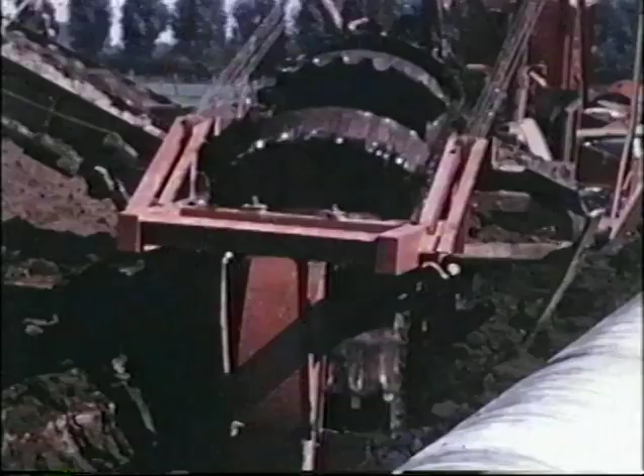In Central Europe, too, the growth of towns and nations was traditionally built on the yield of the soil. Broad fields of flax provided the basis of North Europe's flourishing textile industry. Today, oil and natural gas have wrought changes, laying the basis for a new and higher standard of living throughout Europe.

And far to the west, off the coast of the Americas, in the azure blue waters of the Caribbean Sea, the people of Venezuela have for centuries found food and natural wealth. The oyster beds of the Margarita fisheries were rich with pearl oysters. Centered around these precious gems was the economic life of hundreds of villages, thousands of people.

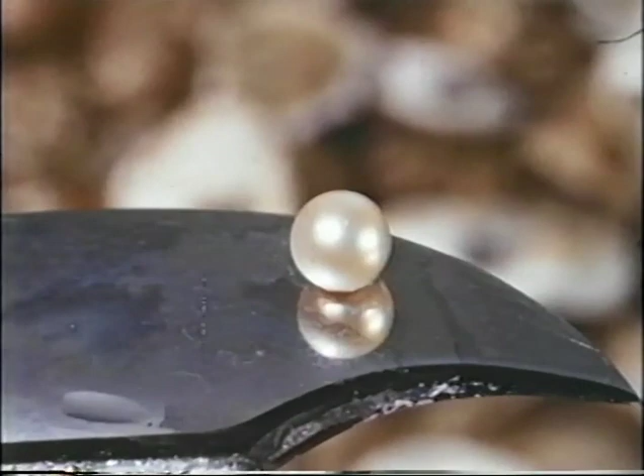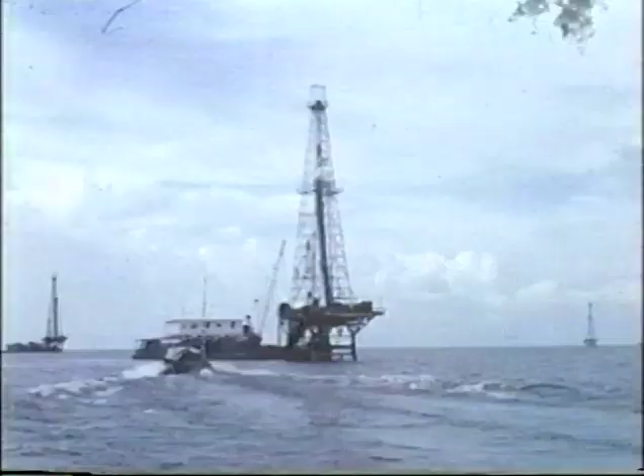Then, less than half a century ago, oil joined the Venezuelan economy. One well became 10, 100, then thousands. In Latin America, in Europe, and the Middle East, anywhere in the field of construction, engineering, and contracting for the oil industry, one name came to the fore.

Few cities in the world have played a larger part in the development of the petroleum industry than New Orleans, Louisiana. Both the city and the state have contributed much. While preserving its past in the old French Quarter, New Orleans is nevertheless a modern and enterprising community.

One of the city's largest and most dynamic business firms is the McDermott Company. With headquarters for field operations here in the Crescent City, it is a globe-spanning organization with oil engineering and construction interests in many parts of the world.

Typical of its work is the Superior Oil Company of Venezuela's Flow Station Number 1 in Lake Maracaibo, which processes 55,000 barrels of oil a day.

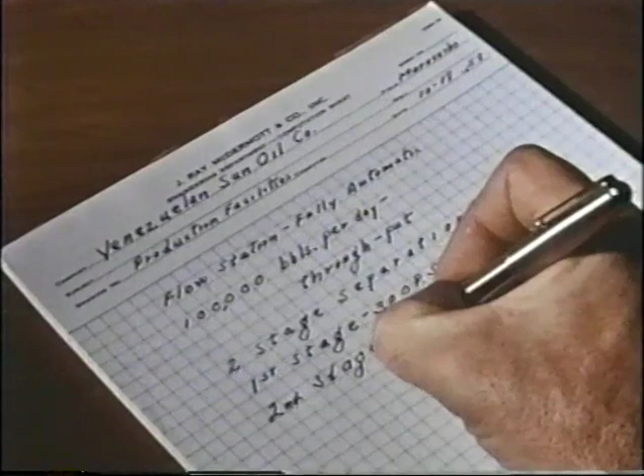Moreover, as envisioned by Sun's management, the flow station would be electronically automated and self-controlled. If the answers to these complex problems could be found, the installation would be a landmark in the history of oil industry progress.

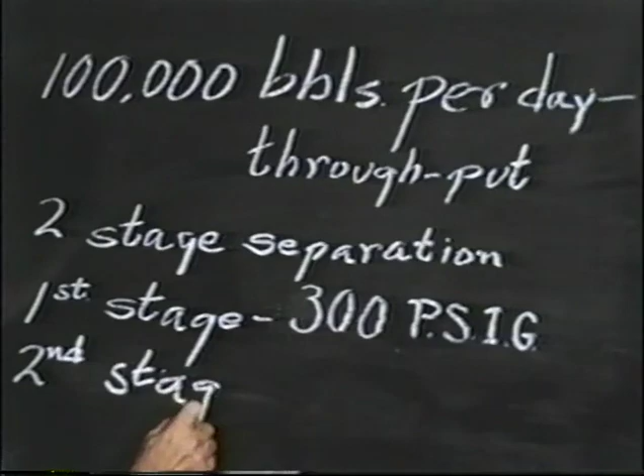All the information gathered at the initial meeting with the Sun management in Venezuela is promptly relayed to McDermott's headquarters in New Orleans. Here, various engineering specialists gather to be briefed on the general characteristics of the flow station desired by the oil company.

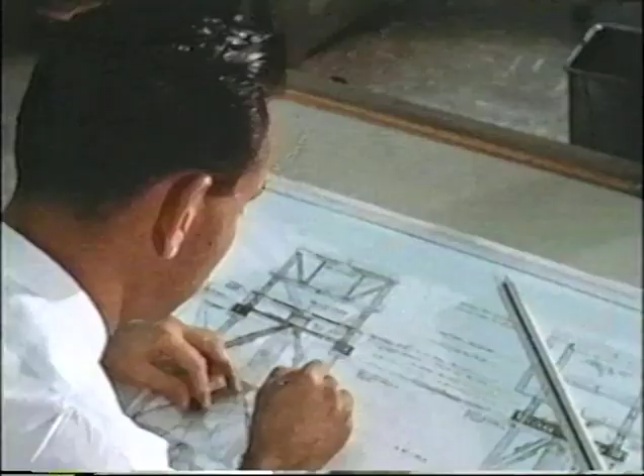Because of the intricacy of design, careful pre-planning will be a vital element in the success of the project. 4 weeks after the meeting in Venezuela, detailed engineering plans are well underway. The specifications being prepared will not only spell out the design of the revolutionary new flow station itself, but also for the procurement, fabrication, and installation of the entire complex of machinery.

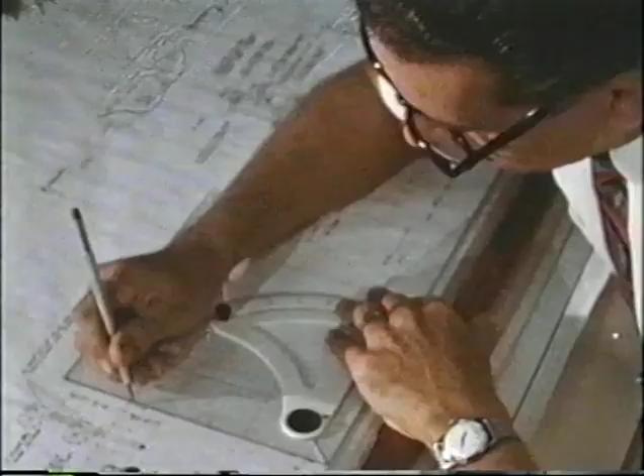Scores of draftsmen devote full time to this single project, and often far into the night. All are well aware that this is one of the most significant projects ever tackled by the company, that they are working on a precedent-setting installation.

All in all, there are some 600 drawings involved. After 6 weeks of intense work, 3 fat volumes of specifications are the end result. At the same time that the specifications are submitted to Sun's management, simplified drawings are presented to show as graphically as possible how the entire installation will be integrated with already existing facilities, how the plans allow for additional flow stations to be added to the field in the future.

Erected on an aluminum structure, the electronically automated production flow station will be capable of handling 100,000 barrels of oil per day with only mechanical supervision.

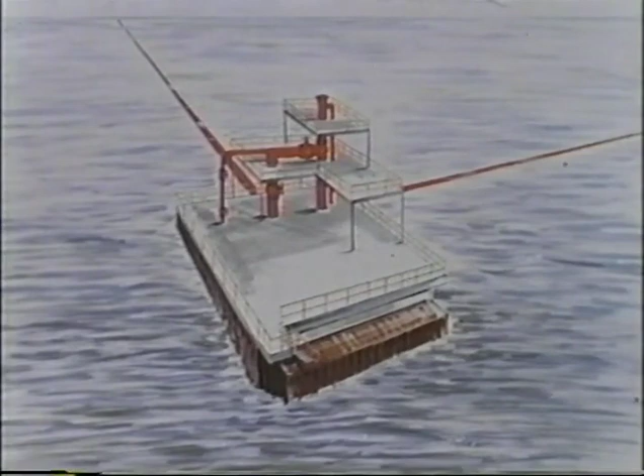Simultaneously, a junction platform will be erected a mile away. This junction of the lines from the flow station is the takeoff point for the 35-mile pipeline to shore.

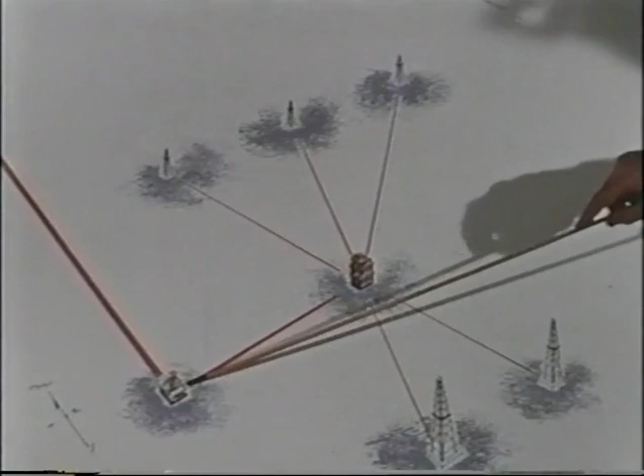Further, it was proposed to construct and install wellhead facilities on each well platform, to lay the flow lines from the wells to the station, to construct and lay the 14-inch gathering lines from the flow station to the junction platform, and to construct and lay the 35 miles of main 18-inch pipeline in 90 feet of water to the tank farm ashore.

All in all, a monumental undertaking.

After several additional meetings, when new refinements are discussed in the list of specifications, Sun gives McDermott the order to go ahead to handle the entire project from the design and fabrication in the United States to installation at the work site in Lake Maracaibo.

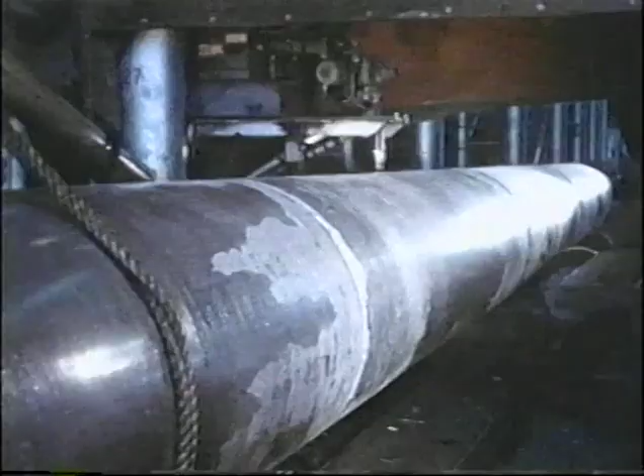7 days later, at the company's Bayou Boeuf plant near Morgan City, Louisiana, the fabrication of the aluminum structure is started. This large diameter aluminum pipe has been formed on the rolling mill from 3/8-inch flat plate here in the plant. The caisson, an integral part of the structure, will be built in similar fashion.

At the same time, in another part of the yard, work on the flow station itself begins.

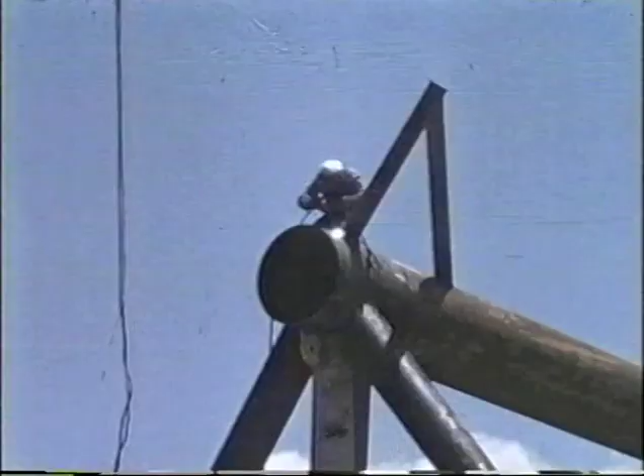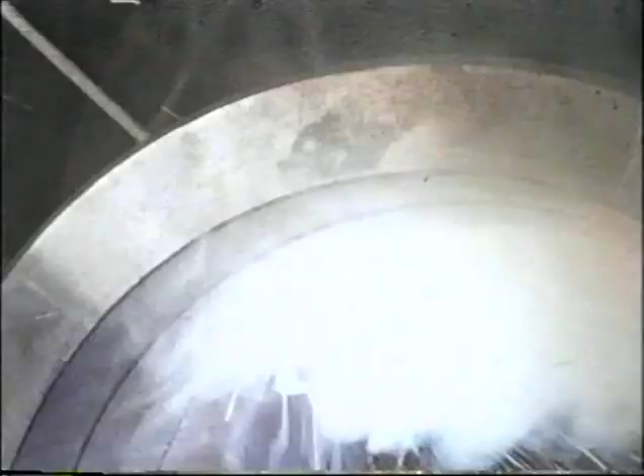Among the first pieces fabricated are the flanges for the risers, which will hook up with the flow lines of each well. Because of the thousands of parts and miles of wire to be incorporated in the giant piece of machinery, a finely drawn timetable is established to coordinate the installation of the various elements at the work site in Lake Maracaibo.

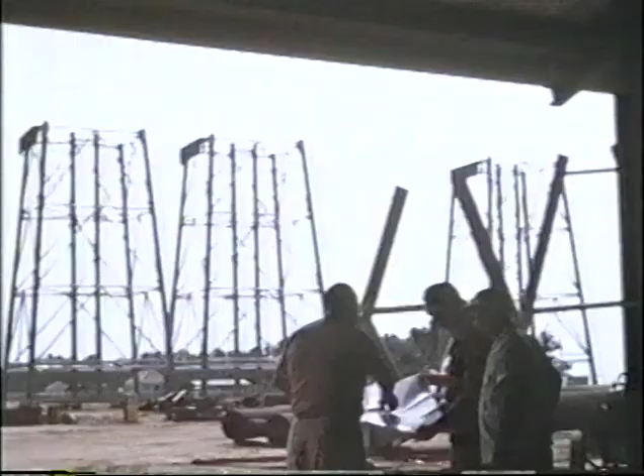Early the following spring, the first sections of the installation are ready for shipment to Venezuela, exactly on schedule. Among the first pieces of equipment shipped is the aluminum foundation, the underwater platform on which the flow station will rest. Contained in it is the caisson or surge tank, which will receive the oil from the separators.

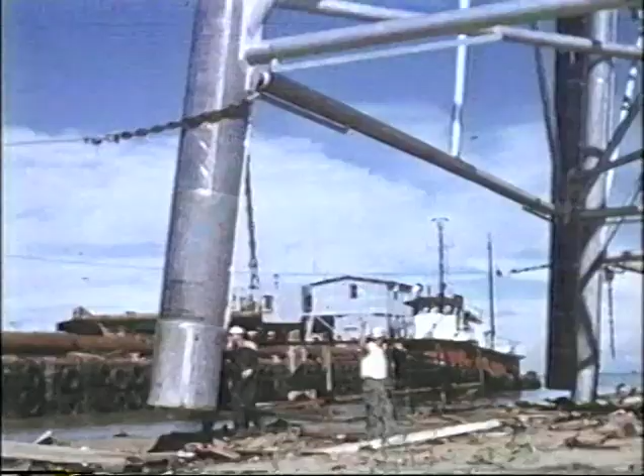The caisson marks a great advance in flow station design. Being under the platform, with an opening in the bottom of the tapered cone, the oil in the caisson is supported by the waters of the lake, thus relieving the foundation of the weight of the oil.

Days later at Maracaibo, the structure is ready for installation. The use of aluminum is a feature of McDermott's Venezuelan operations, making the company a leading fabricator of heavy welded aluminum structures. The highly corrosive water conditions found in Lake Maracaibo have plagued drilling and producing operations for 30 years.

A few years ago, engineers of Reynolds Metals Company and McDermott worked together to design a deep water platform that would have the structural strength of steel and yet be completely corrosion resistant. The result? A metal structure with underwater lateral bracing down to the lake bottom, which will resist corrosion indefinitely.

Here is the installation of the foundation as it would appear from under the waters of the lake.

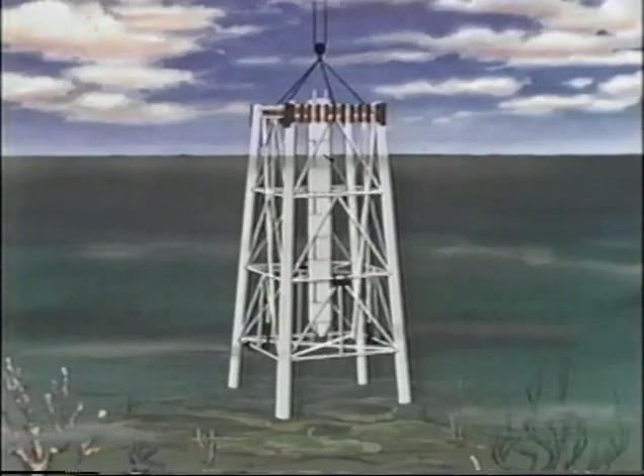Once the aluminum jacket has been placed in position and leveled, steel piles are inserted in the hollow legs to anchor it to the bottom of the lake.

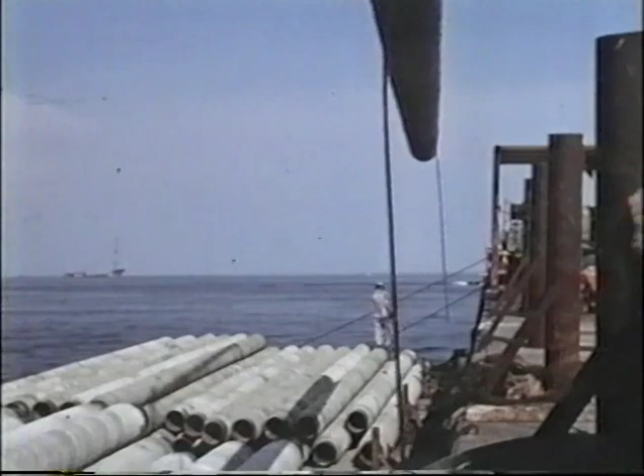At the same time, nearby, the marine pipeline crew is at work laying the 35-mile pipeline to shore. This is a job requiring a tremendous amount of heavy, specialized equipment. The pipe has been coated on shore with enamel to prevent corrosion, and then overcoated with concrete to eliminate flotation.

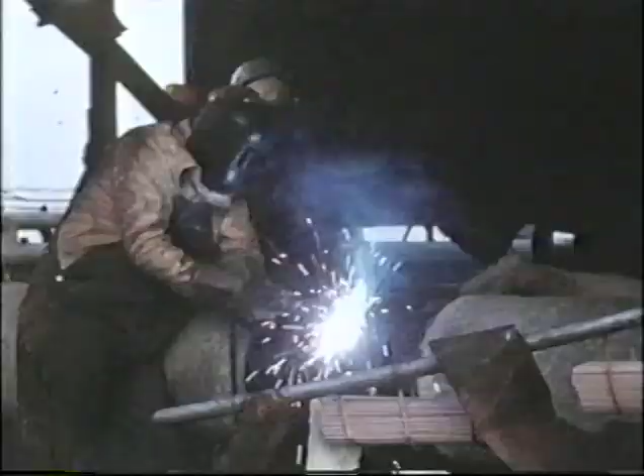These welders on foreign duty are a special breed, taking pride in every bead of every weld. As the lay barge is eased slowly ahead, the end of the line is submerged in the water of the lake.

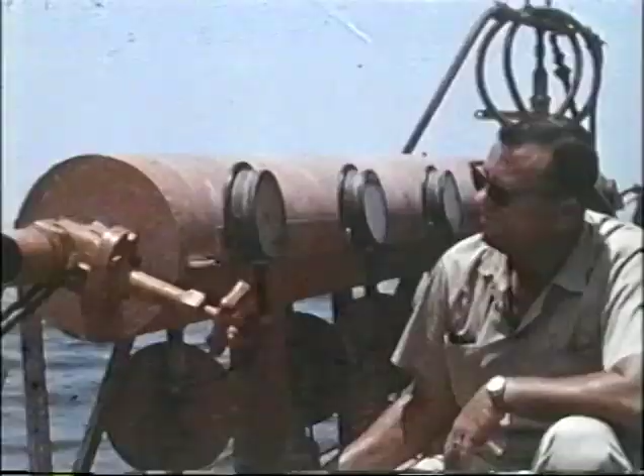Because of the water depth and the weight of the pipe, a buoyant support 265 feet long is used to ease the stress in the pipe as the line is lowered to reach the lake bottom 90 feet below.

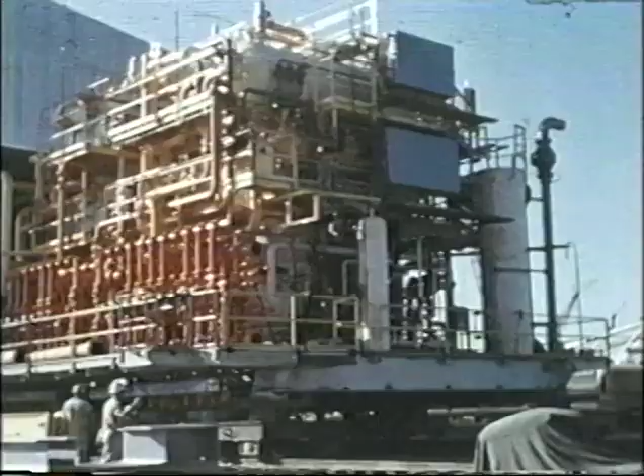Back in Louisiana, meanwhile, on June 1st, 1959, the superstructure of the flow station is ready to be moved from the mill building to a waiting barge. To date, 50,000 man-hours have gone into the construction of this engineering complex.

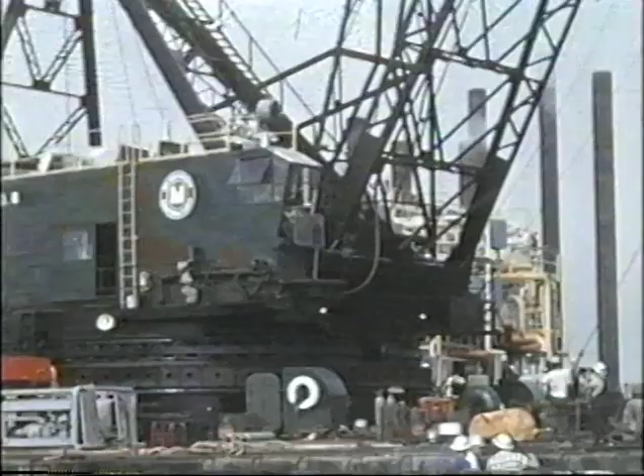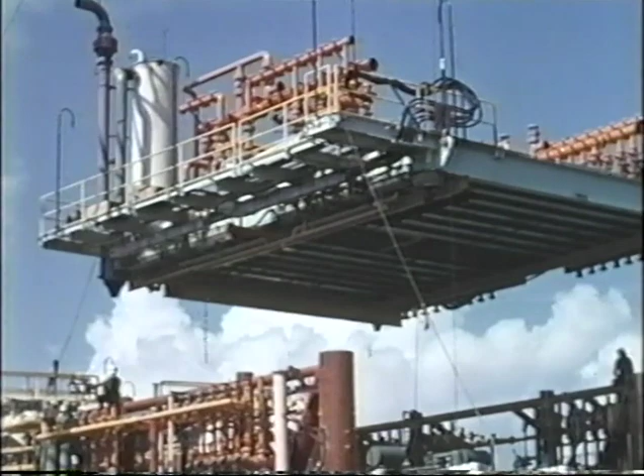All the delicate instrumentation and machinery, pumps, valves, and generators have been polyethylene coated to prevent salt spray damage during the voyage ahead. A great deal of planning has gone into the loading of the barge. Distribution of weight and balance are a vital concern to ensure a safe, successful trip. The color coding of the piping denotes the different fluids which will flow through the arteries of the system.

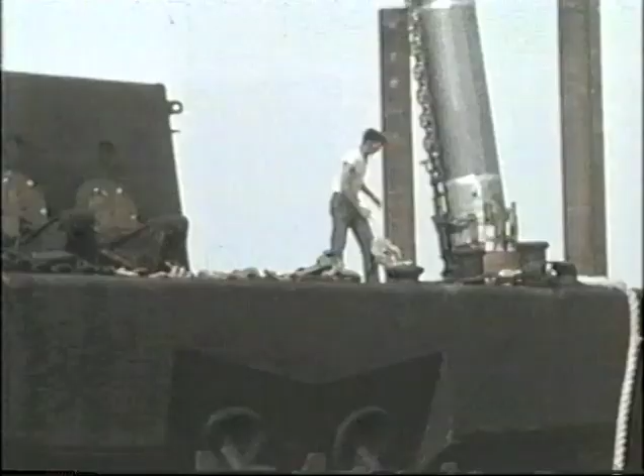The meticulous loading procedures have taken 3 days. Now, on the 4th of June, the flow station sets out for Lake Maracaibo, behind the tug Rosalie, aboard the seagoing barge Venmac II. It will be a trip of 1,900 miles from Morgan City, Louisiana to the lake in Venezuela. For 2.5 weeks, the precious cargo will be under tow.

Aboard also are 2 aluminum drilling platforms for other jobs in the Maracaibo area. Still stateside, meanwhile, in Houston, Texas, an important subcontractor, Texas Instruments, has been at work around the clock on the mechanical brain for the flow station.

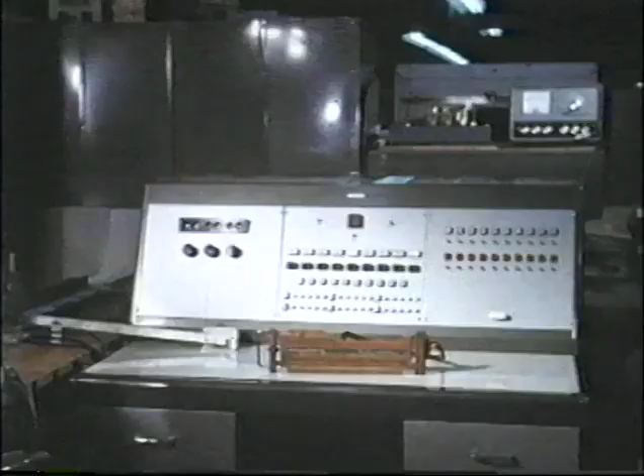Frequent visitors to the Texas Instruments plant are McDermott engineers keeping abreast of the work in progress. As the completion date of the electronics instrument package nears, McDermott and Texas Instruments engineers, scientists, and technicians maintain close liaison.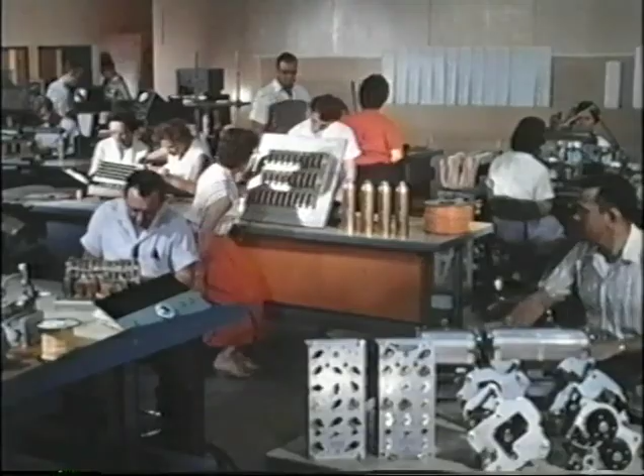Every circuit is checked time and again to eliminate any chance of malfunction once the control center leaves the shop. Thanks to the example of the best in present-day electronic controls, the entire sun installation at Lake Maracaibo will be controlled automatically and will have a central data gathering point on the junction platform.

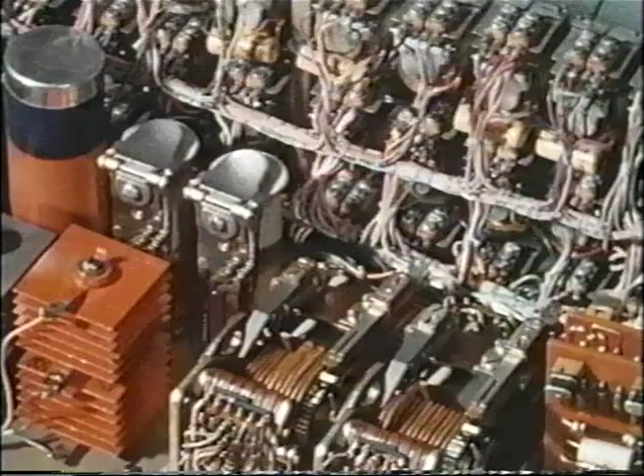Finally, another piece of the complex mechanical puzzle has been put in place. While Venmac 2 is en route to Venezuela, and while the finishing touches are being put on the control apparatus in Louisiana, dozens of technicians and engineers are being processed for overseas service in the McDermott dispensary. Because of its long experience in foreign construction work, the processing is handled as a simple matter of routine.

By air, 7 hours away from New Orleans lies Maracaibo, a cosmopolitan city which a few years ago was little more than a crude village. Less than a year after the initial meeting with Sun Oil's management, the first contingent of specialists from New Orleans arrives at the Maracaibo airport.

Arriving simultaneously with the advance party is the electronic control equipment manufactured by Texas Instruments. Each box is handled with utmost care.

Now the flow station starts the last leg of its journey. Workmen have already left aboard the derrick barge. A derrick barge at night is really something to look at, unless you're on it. Then you've got other things on your mind, like your part in the job that starts as soon as it's light enough to see.

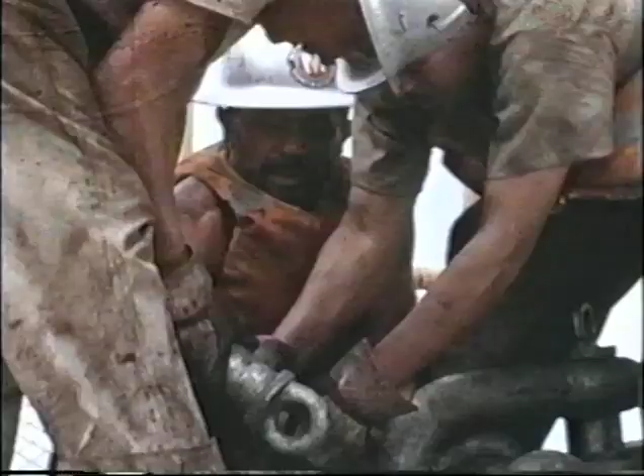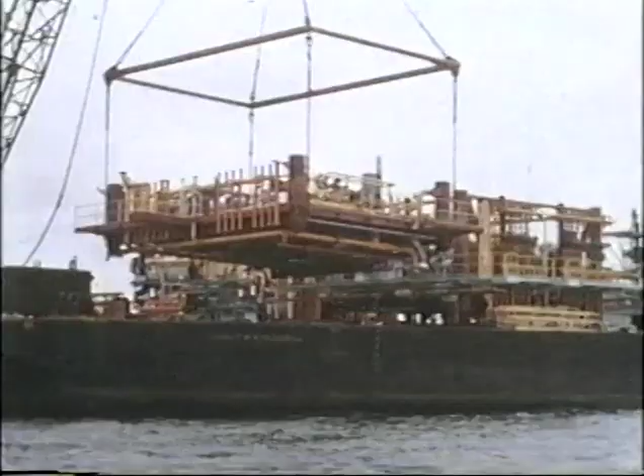When the flow station comes alongside on Venmac 2, it's in place and on time. There's work for all hands, Venezuelan and American, and for all heads, too. The lifts go on one at a time. When we're finished, 5 of them will be piled more than 83 feet high, just about as tall as an 8-story building.

The first one is the 100-ton caisson deck, the section that holds the slop pumps, the caisson metering equipment, and the flow line origin points. This is where the lines from 46 separate well completions will tie onto the flow station.

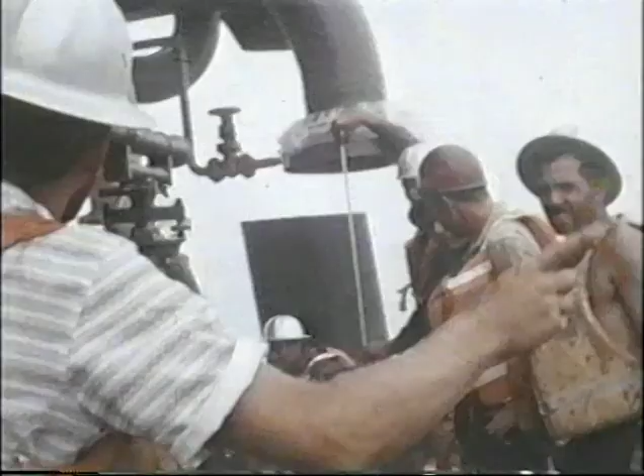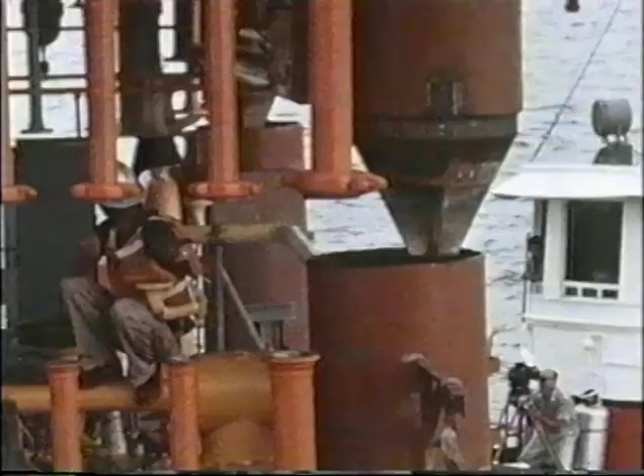Watch those hand signals. Every one has meaning to the barge captain who relays them through his own hand signals to the derrick operator, key man in one of the trickiest of all construction operations. No room for guesswork, no place for amateurs, no margin for error. Everything has to fit.

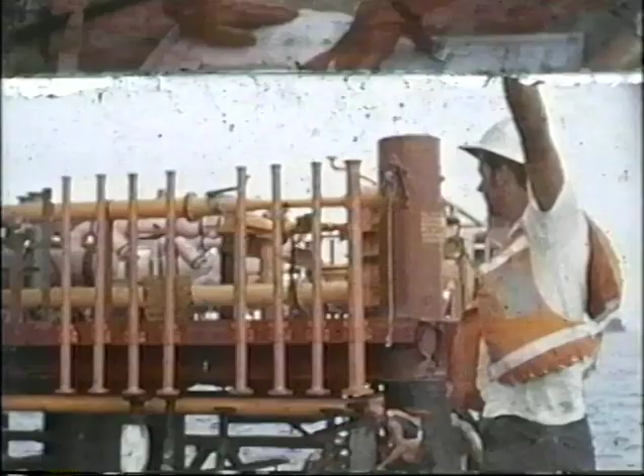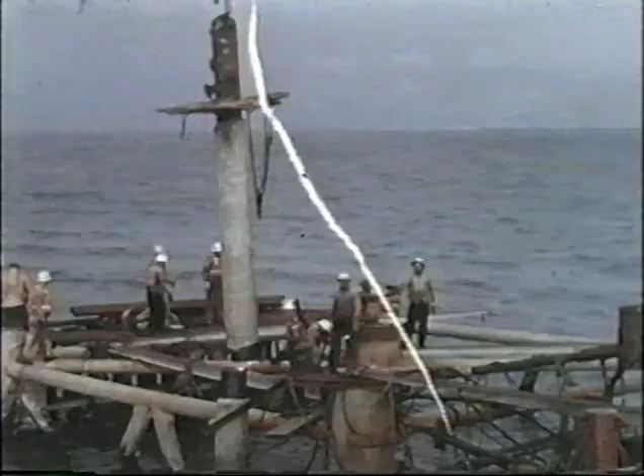At the same time we're working on the flow station, another crew a mile to the west of us is working on the junction platform.

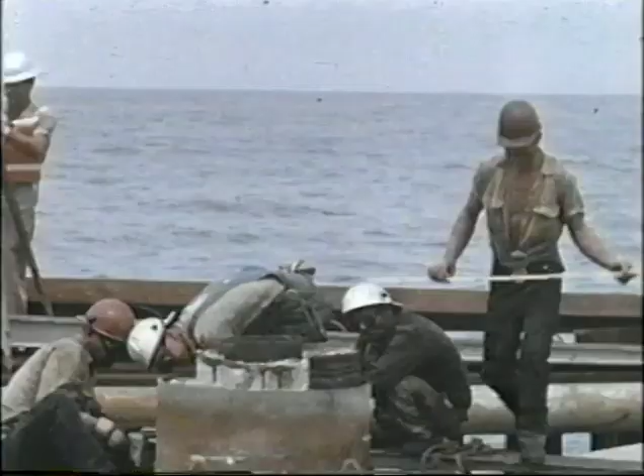This is where the pipeline carrying separated oil from the flow station will junction with the main line that carries it 35 miles to the tank farm on shore. After the platform is finished, it will have 2 more decks, with a warehouse for spare parts, living quarters for a maintenance crew, and a landing pad for helicopters.

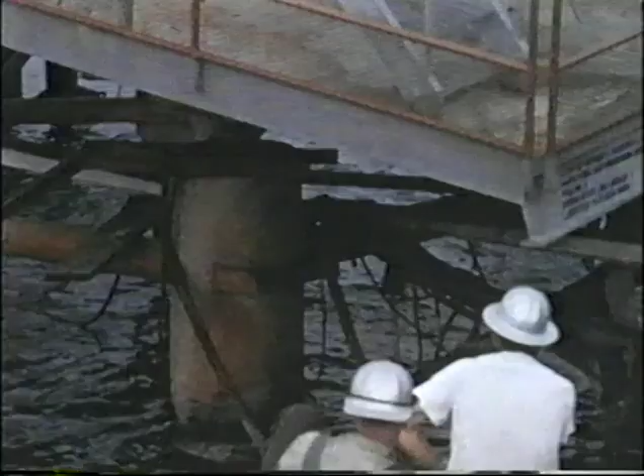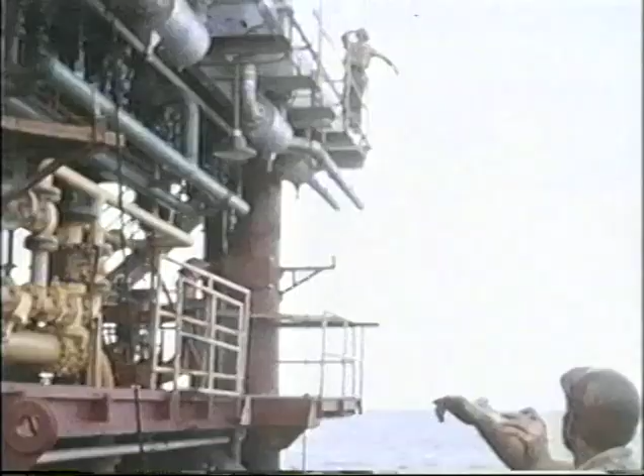All the comforts of home, plus provisions for several more pipelines from flow stations which aren't even started yet. It's not quite noon now back at the flow station, and we're ready for the third lift. This is a light one, the separator deck, only 32 tons. The separators themselves come later.

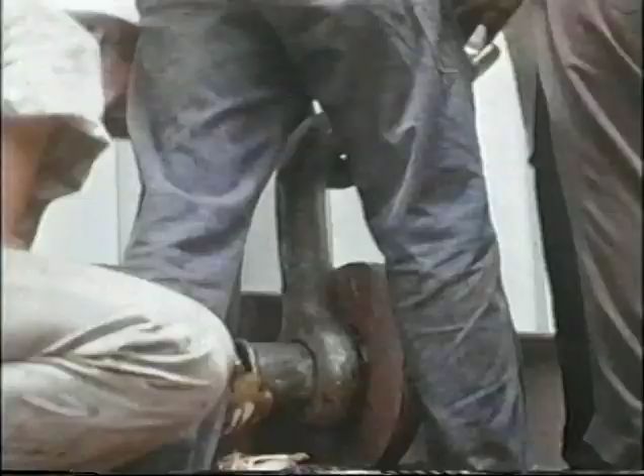With the deck in place, it's welded off, so that each supporting leg becomes a single solid column. Almost an hour later, we're ready for the next lift, number 4, the first of the 2 banks of separators. It's routine and simple, involving just a spreader bar weighing about 8 tons and some cable and shackles.

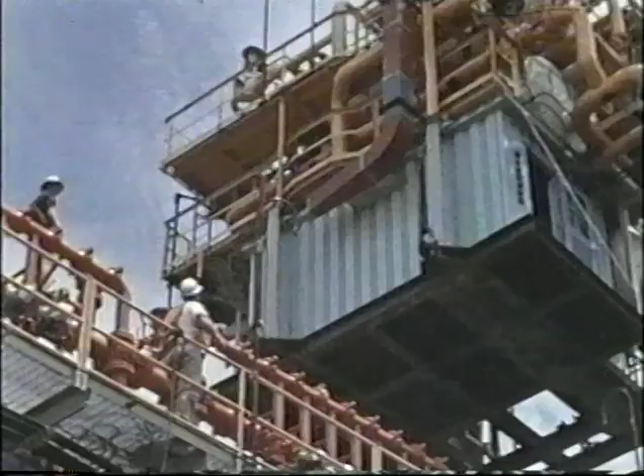That pale green control room in the separator bank is where the instrument panels and electronic control gear will go when the job is completed. When it is, the electronic brains and mechanical muscles will take it over and run it almost by themselves.

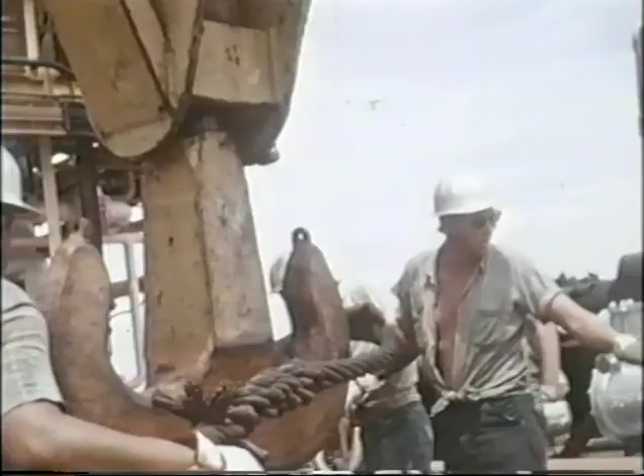They're great things, all right, when you stop to think about it. A bunch of machines running something as complex as a flow station. But it'll be a long, cold day before they can take the place of men when it comes to building one.

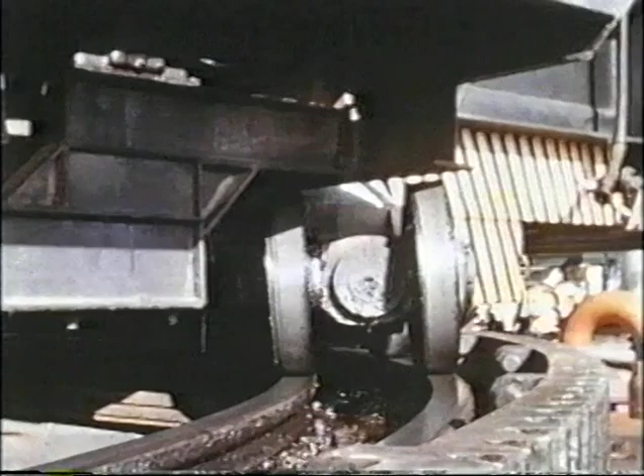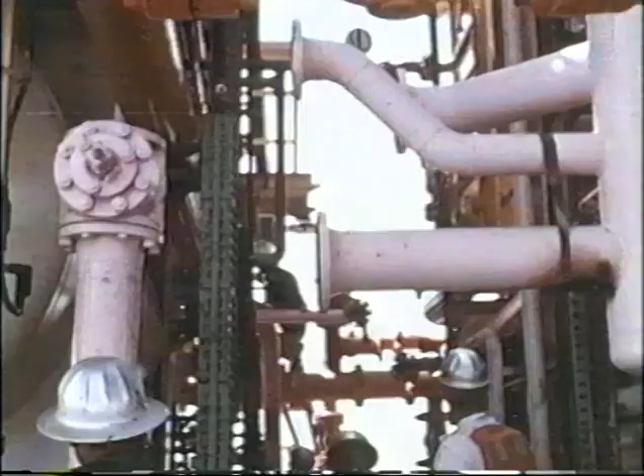By the middle of the afternoon, we're ready for the fifth and final lift, the second separator bank. This unit houses the high and low pressure separators. The test separator is in this unit too, the special test system that can single out any one well and give it an individual performance checkout. Then after testing one well, it can move on to test the others one after another without disturbing the regular production of the other wells running through the other separators in the bank.

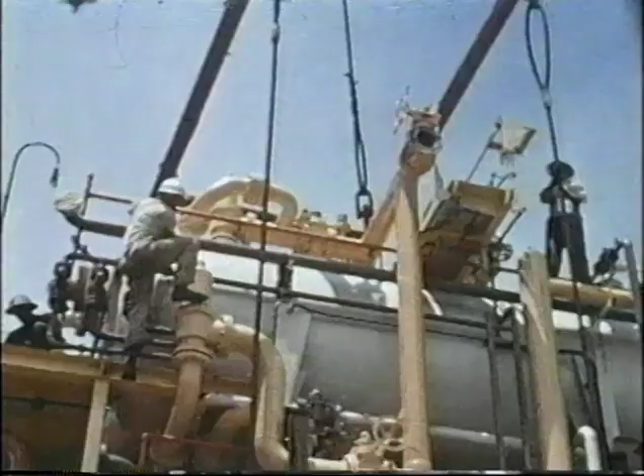Well, that's it. 30 hours from the time the derrick barge first moved in alongside Venmac 2. Less than a day and a quarter for a job that could have taken 3 or 10.

Maybe it's some sort of a record. We don't know. We weren't working for a record. We were building a flow station. In any case, it's up and it's ready for the next step, and for the Texas Instrument boys who are right behind us.

We engineers from Texas Instruments have a pretty elaborate job to do, too. Before connecting a single wire or transistor, we've got to check every unit of the complex apparatus to make sure there's been no damage during shipment between shore and the worksite.

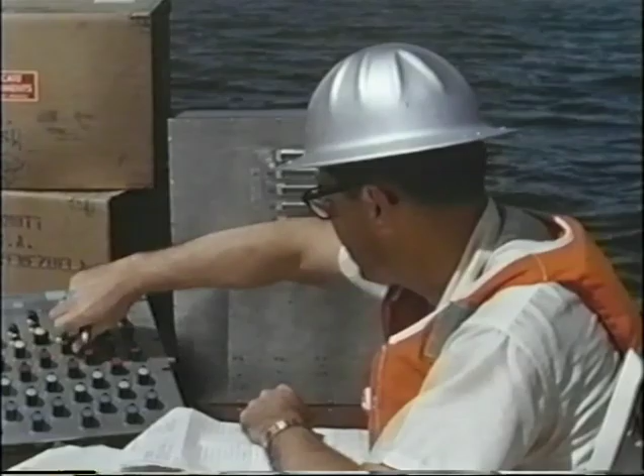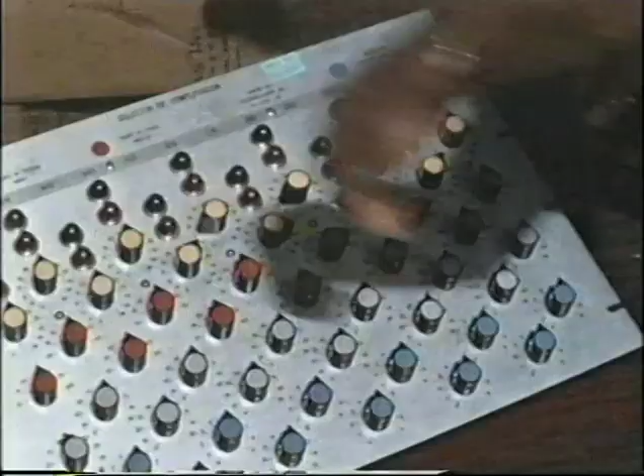When assembled, the control unit will form the brains and nervous system of the entire installation. Through automation, it will monitor the pressure and flow of oil from each connection, and will shut in a well and sound an alarm on the junction platform if anything goes wrong in the separating or pumping processes. Each of these multiple circuits controls a single well.

Essentially, automation means greater efficiency and economy in the entire operation. At the flow station, we finally unpack the electronic components for the control panels.

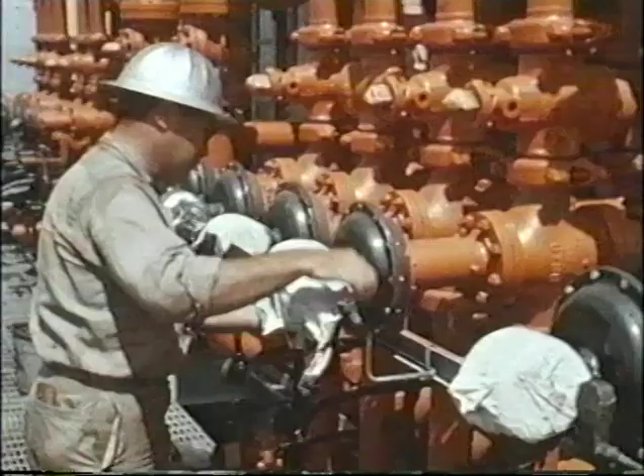But regardless of what anybody else is doing, it's still McDermott's baby till it works, until we turn it over to the customer. It's our electrical engineers who must examine all the circuits between the flow line control valves and master control, and who are responsible for okaying them.

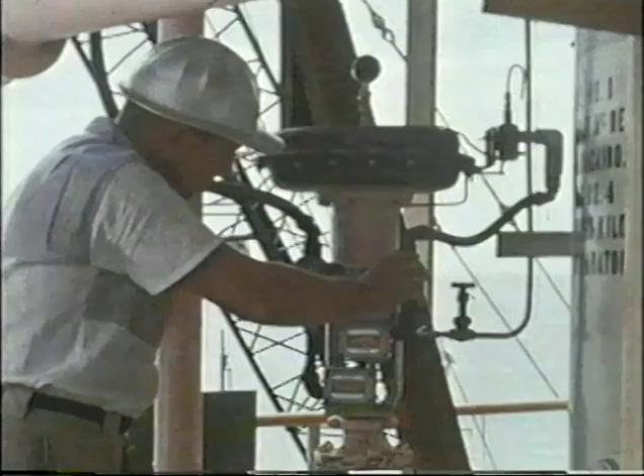Altogether, the hooking up operation takes us about 6 weeks. One bad connection, one badly adjusted valve, can throw the whole system out of kilter and start a chain reaction of trouble. There are more than 2,400 electrical connections to be tested, and something over 3,000 engineering checks that have to be made before we can start operating.

Not counting checks and tests at the junction platform, that is. Tests here show us that all the valves are operating, and that they're set correctly to assure an even flow without a break from the flow station all the way ashore.

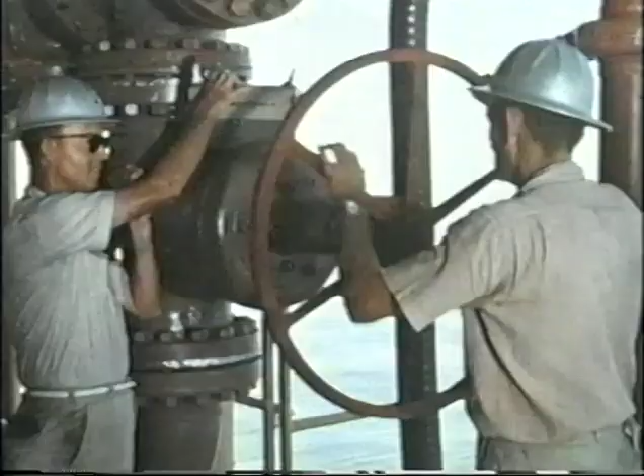The big moment, August 12th, 1959. But it's got to be a slow big moment. The job started February 1st, and it was finished on August 12th. 6.5 months from the start of construction to the opening of a working installation more than 1,900 miles from the fabrication shop back home. And it is a working installation.

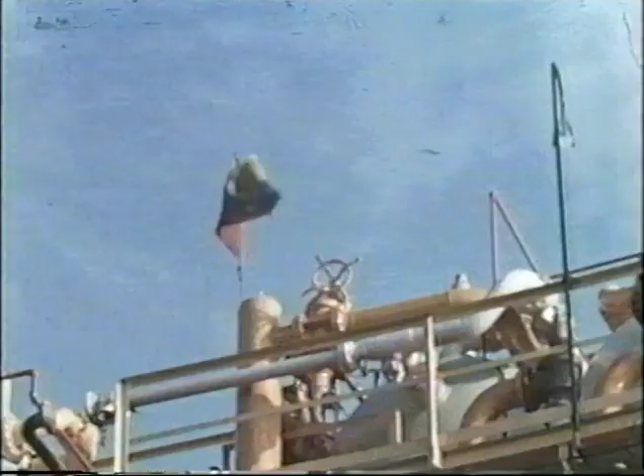After 6 weeks of manual operation, handling 25,000 barrels a day, it will be ready to move into high gear for the automatic handling of 60,000.

We Texas Instruments men have to make one final test, a check on the taped record of the flow station's performance kept by the control center. After a prescribed length of time, the punch tape from the recording machine is picked up at the flow station for delivery to a translating machine ashore.

Eventually, this hand-carried method will not be necessary. Soon, the memory unit on command will put itself on radio and broadcast its information to the data translating machine. The memory unit will transcribe information on one tape for 30-day periods.

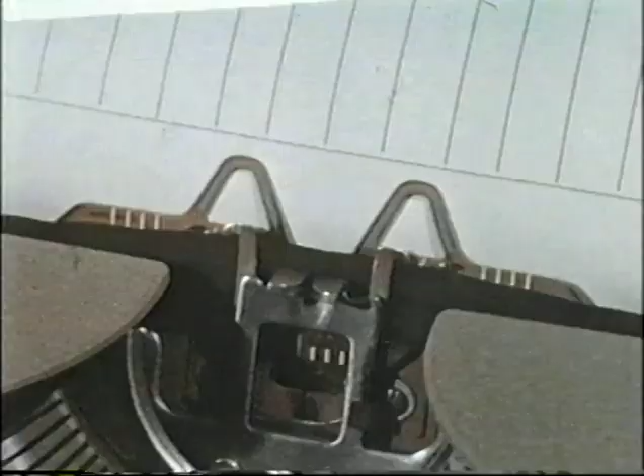Temporarily, during these first test phases, the translating equipment is housed ashore in Maracaibo. The taped record is fed into a teleprinter, which types out production data for a day, a week, or a month. Vital information, once passed on by telephone, is now handled by electronics. The data processing machine reports figures compiled by our checkout engineers in the field. From separators to caisson, from pump deck to junction platform, the entire installation is functioning smoothly.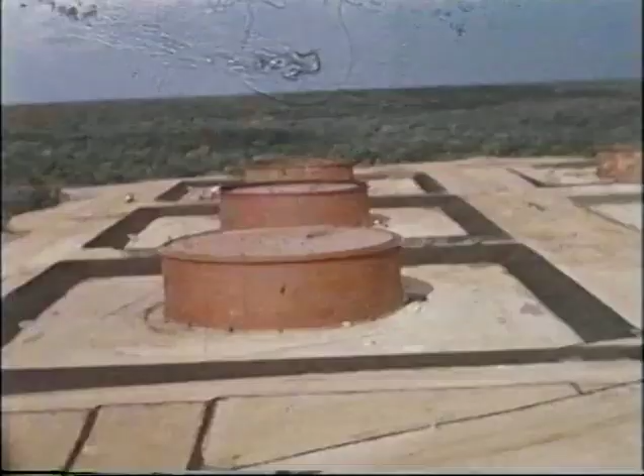Today, Sun Oil's flow station number 1 has a rated capacity of 100,000 barrels a day throughput. Oil is being pumped into the tank farm at Punta de Palmas on the shores of Lake Maracaibo. Tanks like these hold 180,000 barrels apiece.

From all over the world today, tankers come to Lake Maracaibo to take on cargoes of crude oil pumped from underwater reservoirs. As part of its job here in the rich Venezuelan oil fields, McDermott has designed and installed special mooring buoys, which enable tankers to load from submarine lines far offshore. Often, the tankers need not put into dock or wharfside to take on their cargoes.

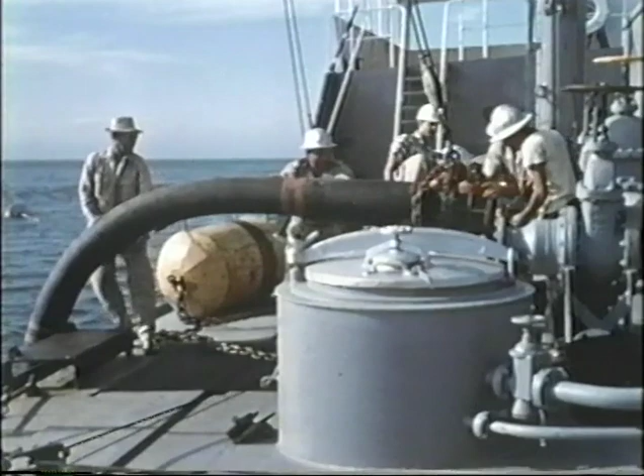And from Maracaibo today, tankers leave with thousands of barrels of crude produced through this unique installation for ports the world over. Rarely in oil field construction history has so much been accomplished in so short a time. This flow station is truly a testament to one organization's experience, skill, and versatility.

Here now in the heart of Lake Maracaibo rises an artificial man-made island, an automatic processing plant which works 24 hours a day, 7 days a week. Sun Production Island number 1.

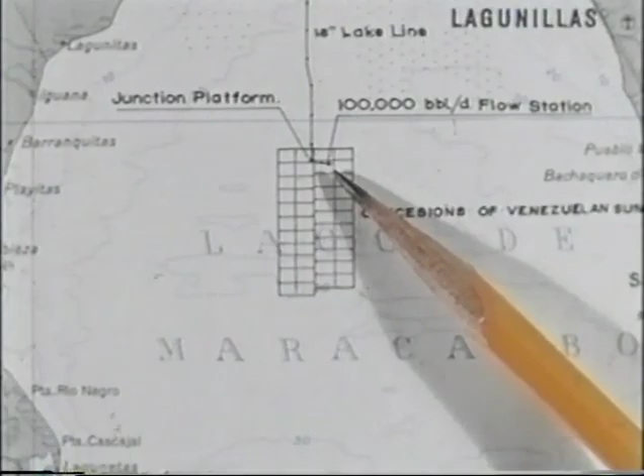A pioneer in the development of the jacket-type drilling structure, the company has erected over 75% of all those in the Gulf of Mexico. The unique design and method of bracing enables these structures to withstand tremendous loads.

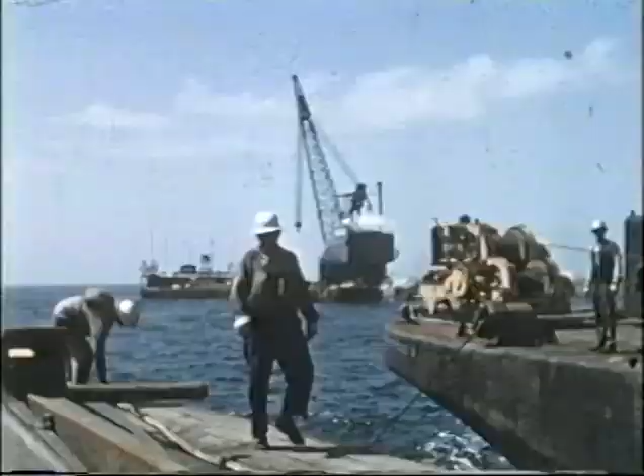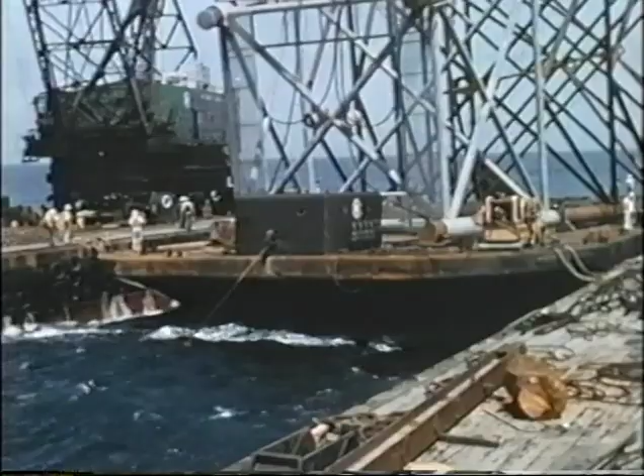Under tow here for installation at a Gulf oil drilling site is a 230-foot structure, the tallest of its kind ever built. At the start of the installation, the structure is lowered into the water in a horizontal position. When drilling starts from this completed structure, a new record for deep water drilling from a fixed platform will be established in the Gulf. The installation is being made in 205 feet of water.

The structure is rotated to the vertical position, and after piling is driven through the legs, installation of the drilling equipment begins.

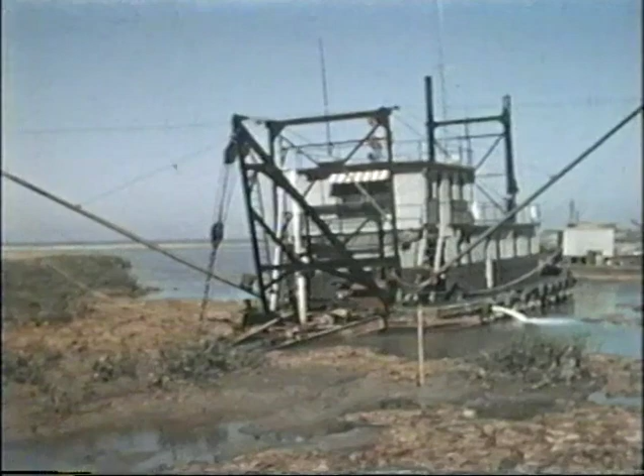At the same time, in the Louisiana marshes, McDermott suction dredges are busy on inland drilling locations for many different companies.

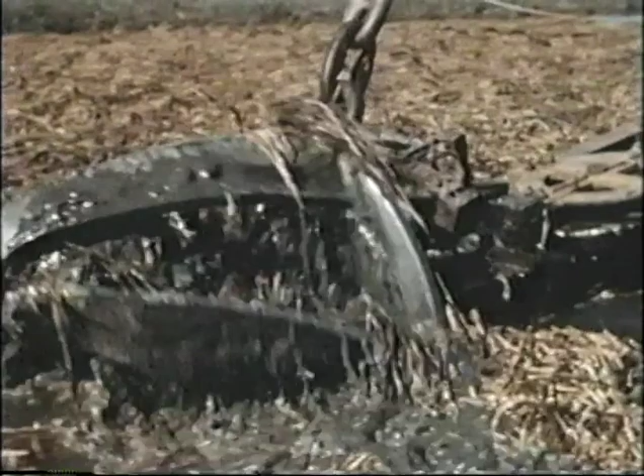Far to the south in Argentina, work is underway on a long crude transmission line from the Comodoro Rivadavia oil field to the Atlantic coast. An additional 25 miles of 6, 8, and 10-inch gathering lines will be laid in this oil field for the Pan American Argentina Oil Company.

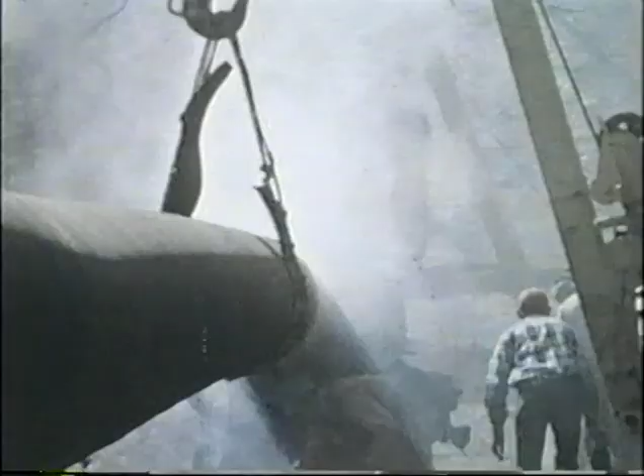In times of emergency, almost anywhere in the Gulf, McDermott's barges are the first pieces of equipment arriving to serve as bases for fighting oil well fires.

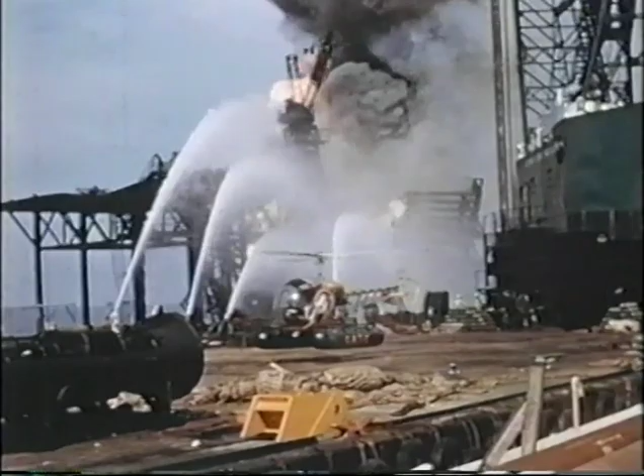The company's engineering and contracting interests extend far beyond the oil industry. Pipe laying of all kinds is within McDermott's sphere, such as this underwater molten sulfur line for the Freeport Sulfur Company. This multiple 7-mile pipeline was made up on a 2,000-foot long pipe rack.

From which it was launched into the Gulf of Mexico. Here it will connect with a structure which, when completed, will be the world's largest steel island. This section of a deck alone, just being lifted into place, weighs 650 tons.

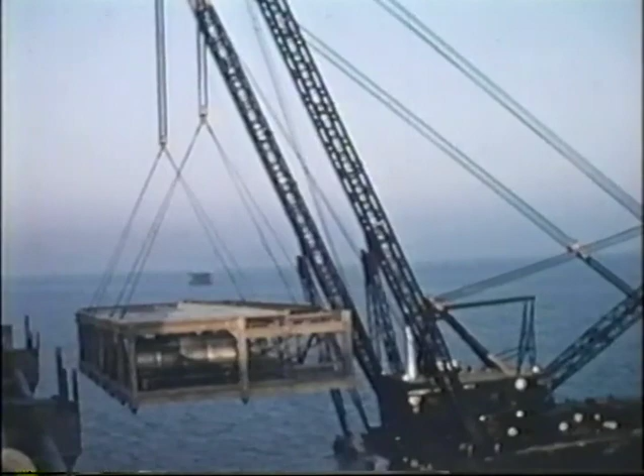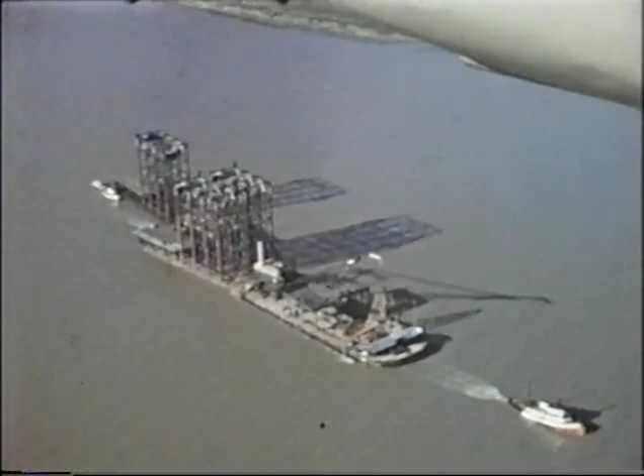At any given time, the company's tugs and barges may be found heading for a variety of different work sites around the world. To the Persian Gulf off Iran for Pan American International, to the Gulf of Paria off Trinidad for Dominion Oil Limited, to the Gulf of Campeche off Mexico for the Pauley Pan American Petroleum Company.

Because of its accomplishments to date, the company can well be proud of its part in meeting the responsibilities of developing and conserving some of the vital natural resources of the free world.

Day and night, around the clock and around the world, McDermott is on the job, meeting challenges, solving problems, introducing new ideas and new methods. Each new job represents another step along the paths of oil progress.